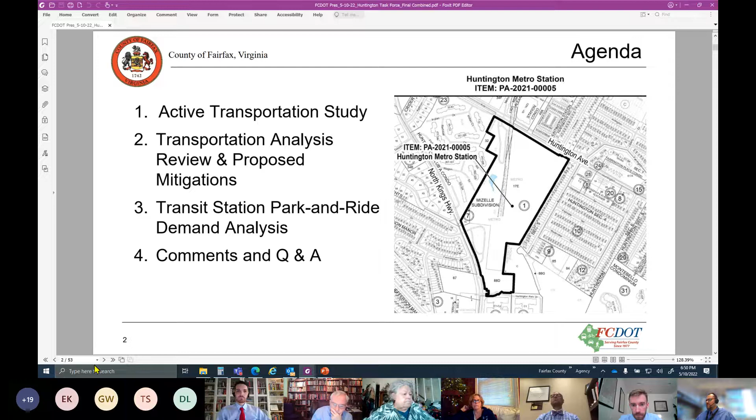I have your slide up here, sir, and you are on. All right, thank you, Bob. Okay, so the first part of our presentation today is going to be talking about the Huntington Metro Rail Active Transportation Study. We introduced this to you all a couple meetings back. This was a grant that FCDOT had applied for as part of a MWCOG initiative to do studies that look at transportation and land use connections. This was a good fit for that grant program, and we've been working on it since about last fall, and it'll be wrapping up in the next couple months.

We do have questions and answers at the end, but there's going to be a lot of new content here that you might not be used to seeing. So please feel free to raise your hand throughout or just chime in and let me know if you have a question on any of the slides. So we can go to the next slide.

So what we're going to be talking about in relation to the study: background and purpose, which I've already kind of done, but also what the purpose of the study is, the methodology behind it. When we talk about traffic analysis, we're looking at vehicular delay and capacity on the roadway. This study, however, is looking at the perspective of the pedestrian and the bicyclist. There's a couple different metrics used to do that, and I'll go over how that's conducted, the analysis that goes into putting together the study.

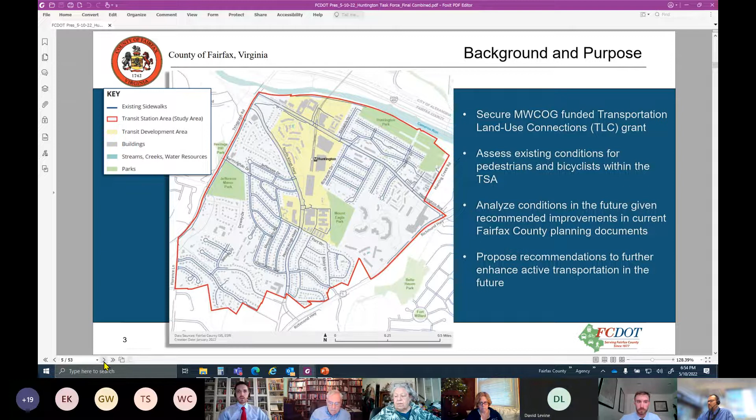One other thing I wanted to mention: last meeting we talked about the Dover-Cole study that was looking at interparcel connectivity. This really looks at the area outside of the Metro Rail station, the TSA surrounding it. We didn't want to overlap with what Dover-Kohl is doing, but that being said, we are incorporating some of their recommendations, such as the connectivity across Huntington Avenue.

I did want to mention a takeaway from our last meeting. We talked with the Disability Services Board, DSB. Their chair, Deborah Hammer, who is also the Mount Vernon district rep, and Claudia Villa, who works for Family Services at Fairfax County and is a liaison to DSB, specifically about the interparcel connectivity between Huntington Club and the Metro Rail station. We discussed some of their considerations when we showed them the concept with the meandering trail and switchbacks going up toward the metro station.

They weren't opposed to the design as presented, but one thing they did mention is, given the grades, something we'd want to consider in any interparcel connection along that steep grade would be to include more landing space. There are current requirements to have landings along the route, which we showed in the concept Dover-Kohl created, but they would like to see more of those. I think this task force can certainly consider that as we recommend plan text for any interparcel access, especially important for the disabled.

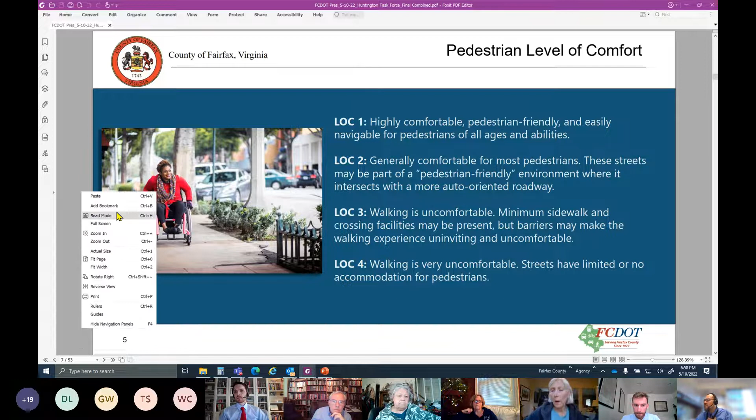I think I see a hand raised. Catherine Ward, you have your hand raised? I'm sorry, but I keep losing your slides. I don't know why, and then it just shows up with an RP and a big circle in the middle of my screen. I don't know if anybody else is having that problem. It may just be me doing something wrong, but I don't know what.

Is everybody else able to see the slides okay? I can see it fine. It's just acting weird in other ways. It comes back, but every now and again it disappears and I get a black screen with a circle with RP in it. Yeah, the RP is me, so I just made the screen full size. Hopefully that helps. Okay, thank you. Sure, sorry, no problem.

This is another look at what each of these scores actually means. Level of comfort, LOC 1, is top of the line, highly comfortable, for all users, with wider sidewalks, 10 feet or greater in width, down to a level 4, the lowest level of comfort, where you might not even have a sidewalk. That's the range we're looking at here.

If you go to the next slide, LTS is scored in a similar way. I don't think it's advanced yet. Oh, now I'm having issues, hold on. Yay, it's not just me. Not just you. There we go, sorry about that. I'm not seeing it yet, no screen. Hey Bob, when you click the share button, try to select the window as opposed to the screen, and then from there click on the PDF.

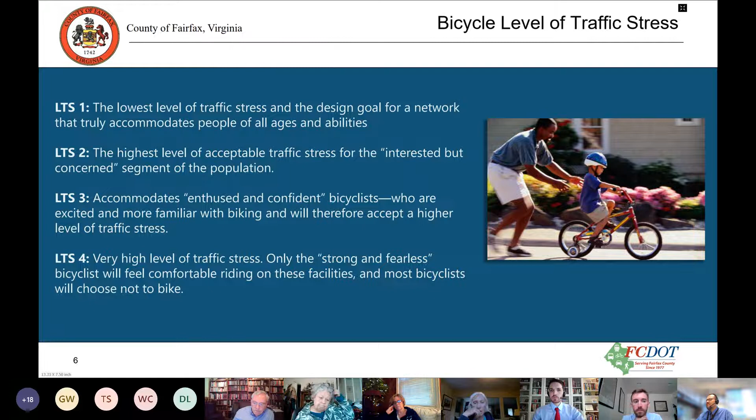Go ahead, Lynn, you have a question? Are we talking about North Kings Highway? Are we talking about Huntington? We're not talking about any of the bicycle stuff up and down the hill. Are we talking about between the Metro and Huntington Club?

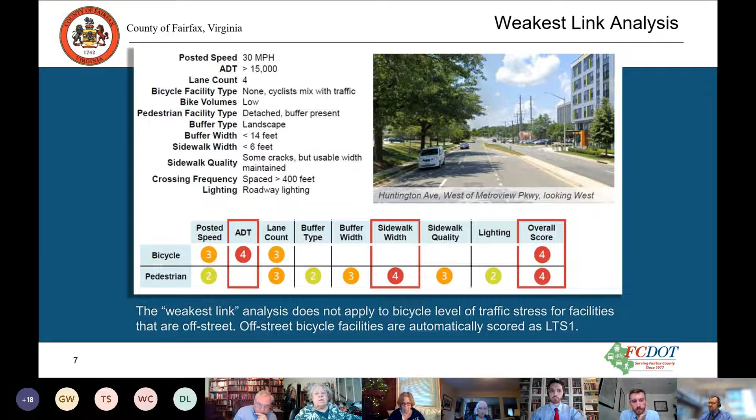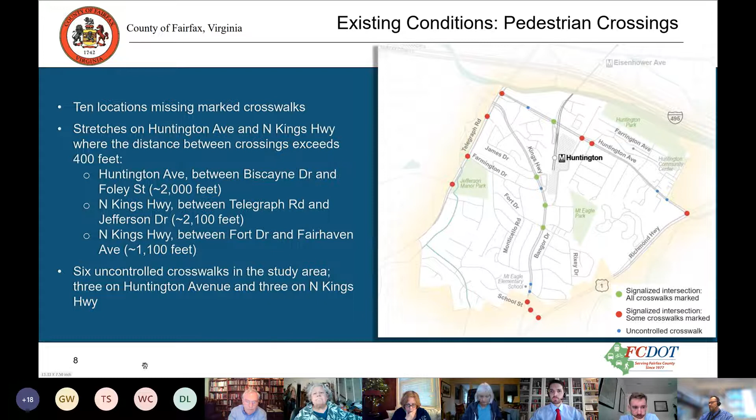If we move on to the next slide, you can see a somewhat similar situation for cyclists.

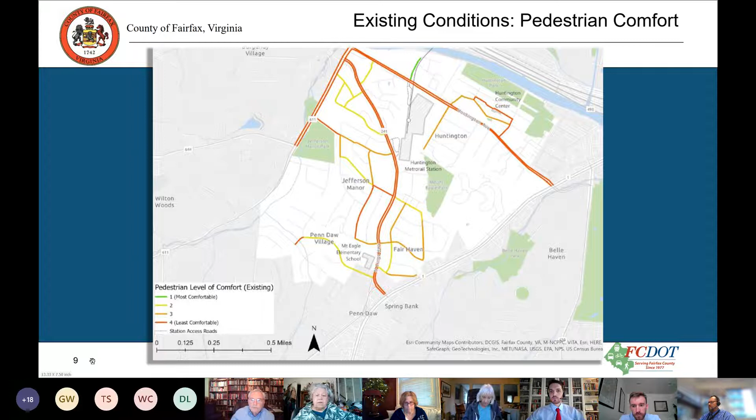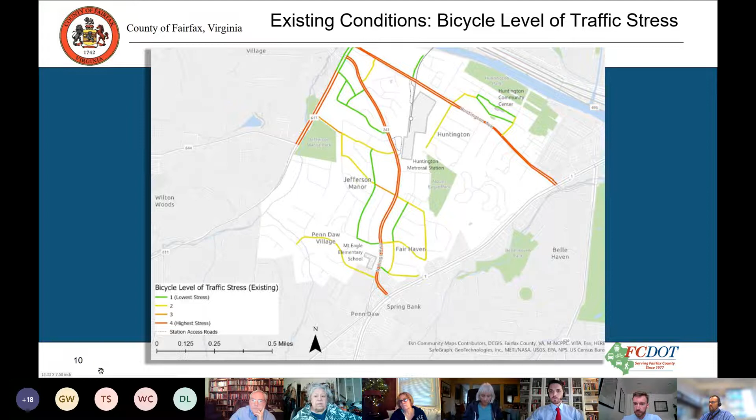So looking at the next slide, these are improvements that are both within the county's current planning documents, so within the comprehensive plan, taking into account the countywide trails plan, for example. We also incorporated a resolution put forward by the Jefferson Manor Association, JMCA, which was also adopted by MVCCA, looking at North Kings Highway south of the metro station down to Richmond Highway.

Those recommendations are highlighted in purple and italicized here, basically allocating the excess space on North Kings Highway from narrowing the travel lanes to pedestrians and cyclists, and installing a HAWK beacon at the crosswalk directly in front of Mount Eagle Elementary School, which is now actually part of the BRT plan. Vanessa had presented on that on the 28th. The other proposed improvements are from the comprehensive plan.

So installing a 10-foot path with a 5-foot landscape buffer along North Kings Highway, and you see what that does to the scores. Still not where we'd like to see them—we're striving for 2 or better—but you do see a bit better level of comfort for pedestrians, and a couple more areas with a 3, a more comfortable walking network for peds.

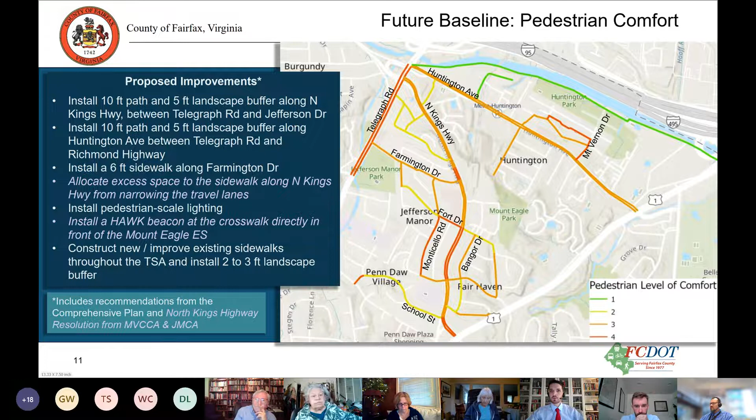So we can go to the next slide and see what these recommendations do for bicycle level of traffic stress. Again, improvements certainly on Huntington Avenue—if we're including a shared use path there, that takes cyclists off the street and separates them from traffic, giving them a lower level of stress. On North Kings Highway south of the metro station, given the limited right of way, there's difficulty improving that score.

So what can we do to further build upon these recommendations? That's what Fehr and Peers looked at. In the next slide we'll talk about a couple of those.

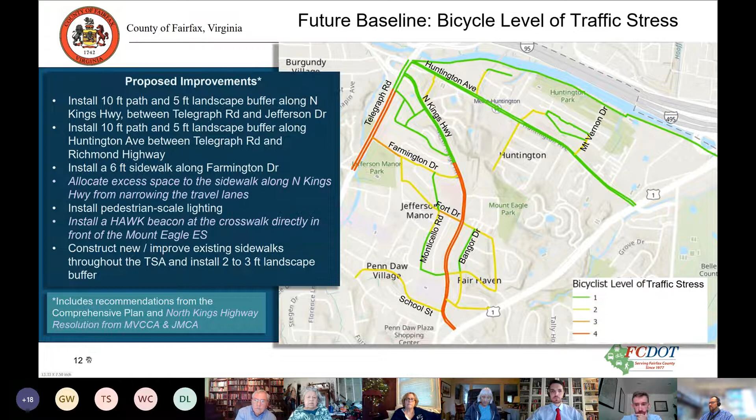One of the concepts they put forward was a slow streets concept, and this really took off during the pandemic. A couple of more urban areas pursued this idea of partially closing off local residential streets to residential or local delivery traffic only, using signage to indicate these are slower speed streets, 15 miles per hour or less.

San Francisco did this, Washington D.C. did this, with a little bit of mixed success. I know D.C. has discontinued their program post-pandemic. I don't think it was successful everywhere—in some spots people ignored the temporary barriers.

However, San Francisco has gone beyond this concept and instituted more permanent measures, as you can see on the bottom right. That's one project that has taken hold in San Francisco post-pandemic, using more permanent bollards or flexi posts to indicate that this stretch of roadway is intended for local traffic, slower speeds, and to share the roadway with pedestrians and cyclists.

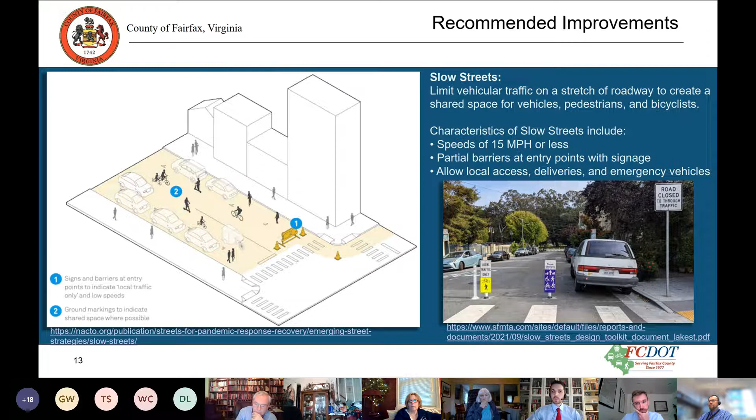We can go to the next slide, here's another concept I mentioned earlier, the road diet. The general idea, as you can see in the image on the right, is to take a car-oriented street with a lot of lanes and parking, pinch that in, give it a diet so to speak, and reallocate some of that space for pedestrians, cyclists, even dedicated bus lanes. That's something Fehr and Peers proposed for Huntington Avenue: removing one of the through lanes in each direction between Telegraph Road and Richmond Highway, providing more space for pedestrian and cyclist activity.

Go ahead, Lynn. Oh, you're muted, Lynn. Lynn, you're still muted.

Oh, I'm sorry, what is that long dark thing supposed to suggest over there when you make a road diet down to two lanes? Oh, so that is supposed to be a bus. That red shading on the right, you could use a road diet to stripe out a dedicated bus lane, for example.

So essentially, Huntington Avenue has four through lanes. If we did a traffic study and determined we only need two through lanes, and there's not a capacity need there, we could repurpose some of that space for a dedicated bus lane. We could repurpose it for protected bike lanes, and again move the curbs in, even perhaps to expand the sidewalk or put in a shared use path. So it's just a recommendation to think through how we can find space for these other uses, and there would need to be some additional analysis to see whether that's feasible.

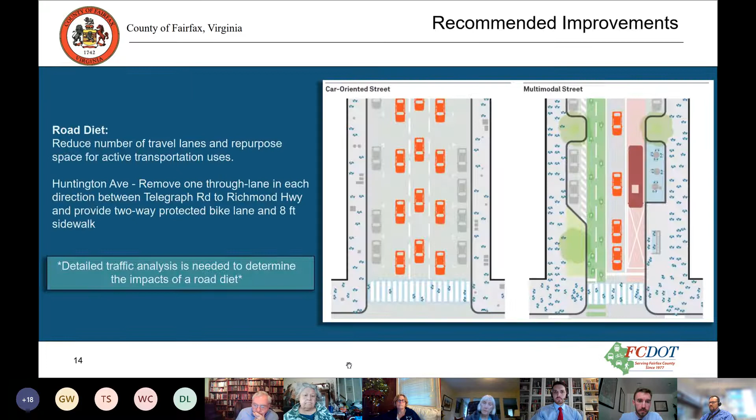But yeah, good point. Okay, I think we can go to the next slide. It's freezing up a little bit.

There we go. Okay, so this is obviously a very wordy slide, but I want to capture all of the recommendations being proposed as part of the study, kind of consolidate them. We will be posting this online, so you can go back and read through these and see which ones you like. If you have any comments, we're going to be doing more outreach as part of the study to talk through these with the larger community. This is a list of recommendations by street that go beyond the ones I already talked about that are proposed in the comprehensive plan and the North Kings resolution.

You see a lot of them are, as I mentioned, the slow streets, improving sidewalk quality. So not only widening the sidewalk, but Fehr and Peers, when they did their assessment, went out and did a field study. They noticed areas that had cracked sidewalk or uneven pavement, so making those maintenance and upkeep improvements could help comfort. And then lighting, pedestrian-scale lighting is a big one, making sure people can see at night. We're not just lighting the roadway for vehicles, but providing lighting at the pedestrian scale so people feel more comfortable walking at night.

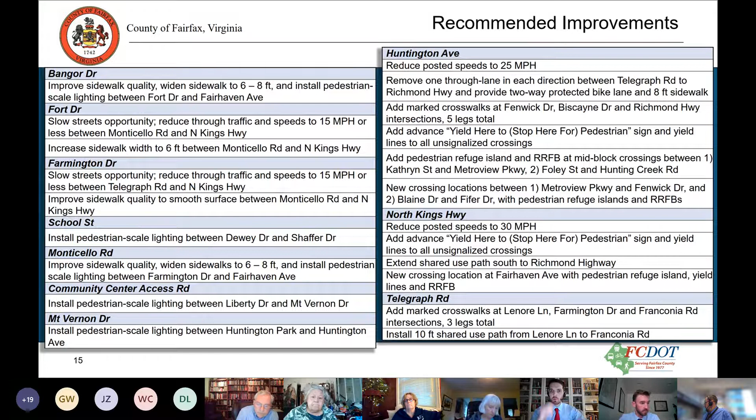Okay, let's go to the next slide. The next couple slides will show, given this list of recommendations, what the effect would be on the metrics we talked about. The first one is pedestrian comfort. You can see that throughout the whole TSA, we've achieved level 2 for pedestrian comfort, so you have a network that is actually comfortable for pedestrians to use.

Lynn: But that's nowhere near your 400 or 500 feet—those are still long walks in between there. Response: Yeah, between those, certainly, there would still be some long walks. And there are only about two others there, I think, in the whole distance.

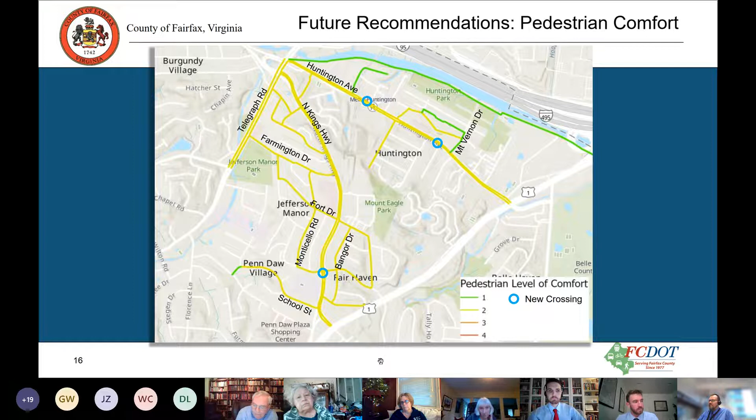Okay, we can go to the next slide—this shows the results for bicycle. Bicycle level of traffic stress is markedly improved. A lot of the recommendations take the cyclist off of the roadway, and when you do that, level of traffic stress doesn't really apply since you're separated from traffic in a sense.

On North Kings Highway, you still don't see the lowest level of traffic stress south of the station, again due to right-of-way constraints. But taking into consideration that there are lanes that could potentially be narrowed, and there is some space as the North Kings Highway resolution that JMCA and MVCCA proposed could incorporate a wider pathway by using the median strip along the sidewalk, there is a solution that could improve bicycle level of traffic stress along the whole stretch there.

So we can go to the next slide, and I believe this is pretty much it for this presentation. As I've said a couple times, we are still finalizing this study. We have Fehr and Peers on until about June, so a few more weeks. Beyond them tightening up the report for us, we're going to go out to the community and various other stakeholders to get their take on this, see if there's anything we need to update or change, and then finalize the study report.

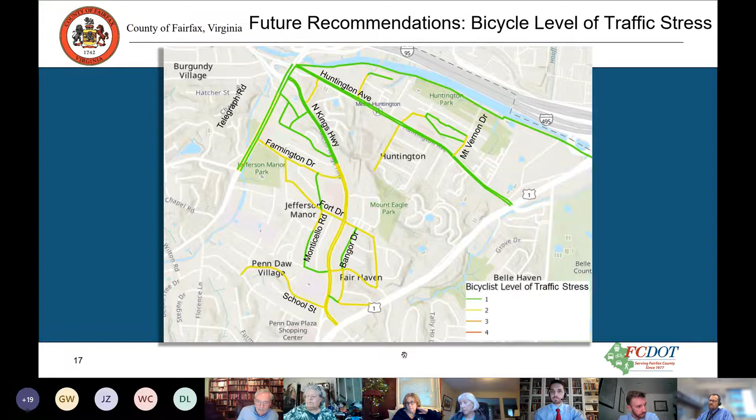Okay. Were there any other questions? That's it. My email is here, so if you have follow-up after the meeting, reach out to me, and I'll continue to keep you informed on how this study is progressing. We can come back to the task force in future meetings to give more information on our outreach efforts.

Let's see, go ahead. Yeah, I have a question. In your last slide, you indicated comp plan language, which the SSPA task force is going to make a decision on. When will we see that? What's the schedule, the plan for that?

So, Graham. Yeah, Catherine. One thing we wanted to go over at the end of the transportation presentations was that exact thing, the next steps. But spoiler alert, next month. So stay tuned, we'll get into the details. Okay, thank you.

Okay, any other questions before we go on to the next? All right, look, Mary has her hand up. Oh, Mary. I just didn't put it down.

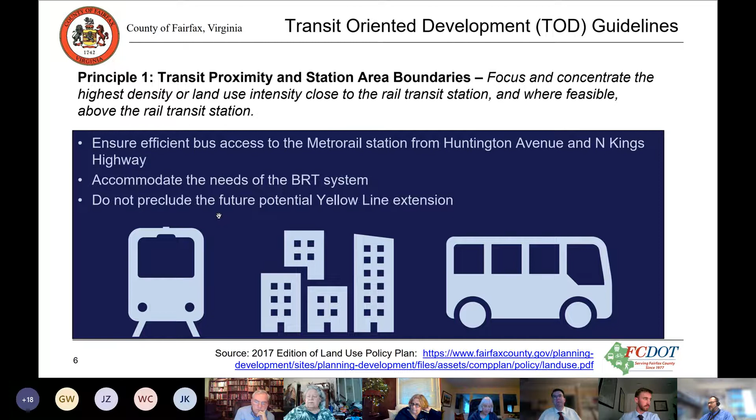When we're looking at transit proximity and station boundaries, we're looking at access to the Metro Rail station along Huntington Avenue, North Kings Highway, accommodating the future BRT system, and definitely not precluding the potential for the Yellow Line extension. That's one of our TOD guidelines. We're also looking at pedestrian and bicycle access. Tim gave a great presentation about bike and ped access, so we're looking at recommendations from that as well, which works into the TIA analysis. We're not trying to preclude the benefits that pedestrian bicycle access will have, so we need to accommodate that within the TIA analysis as well.

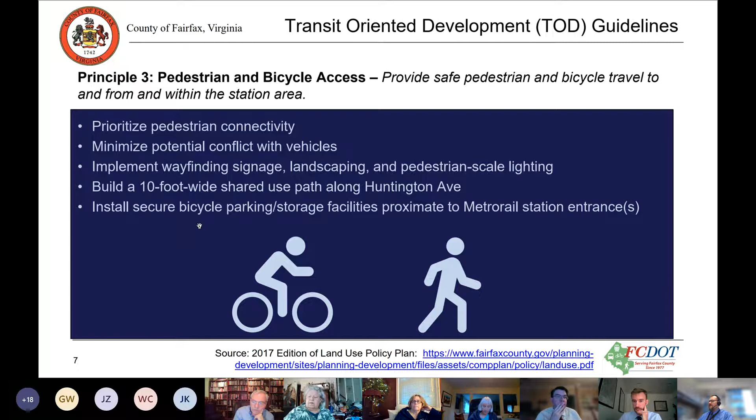Let's see here. This is picky on the advancement here.

Street design: we're looking at safe, gridded, attractive streets, while still mobilizing the vehicles that can get through the area, and also looking at other modes or transit modes in the area. We're seeing accommodation for not necessarily on-street parking, but wider sidewalks, street trees, and such, plus parking on site for the transit use.

I'll have a presentation about the parking garages on the site after this, and also how we're trying to maintain adequate structured parking — not just for the transit use itself, but also so there's adequate parking provided by the new land uses as well.

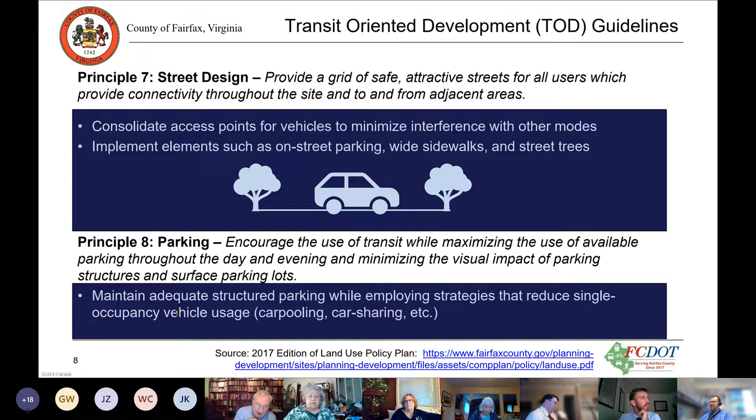Transportation and traffic: we're also looking at transportation demand management as the project is being constructed and built, looking at ways to get people out of single occupant vehicles — ride sharing programs, bus transit planning, parking management, alternative work schedules. We're coming out of COVID now, with teleworking and other non-motorized options like bicycling or just walking. Those are strategies that can be employed.

So those are the background, the TOD guidelines, and it's trying to advance.

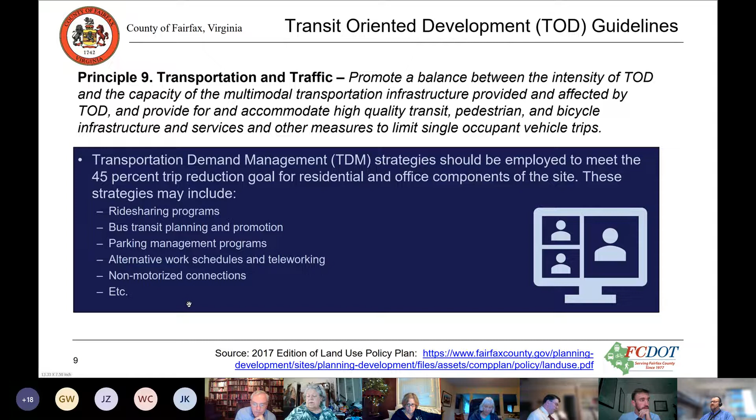As we started the analysis, this is with Kimley-Horn. They did the primary part of the analysis, and we provided them with a lot of data from surrounding properties in the area. Since they started the analysis during the pandemic, early 2020 to early 2021, we weren't able to get out there and do traffic counts, so we had to look at other studies in the area for their traffic impact analyses.

We used that data to give to Kimley-Horn to determine what the traffic volumes or traffic might be like in the year 2019. We used 2019 as the base year.

That was pre-pandemic, so we had a lot of information from the North Gateway CBC — their TIA, Huntington Crossing, the Parker, also 2550 at the corner. Huntington Club has its rezoning TIA that was used, the Arden, Aventon, and we even went down to South Alex in the Penn Daw area for information gathering. All of that was combined to put together the analysis.

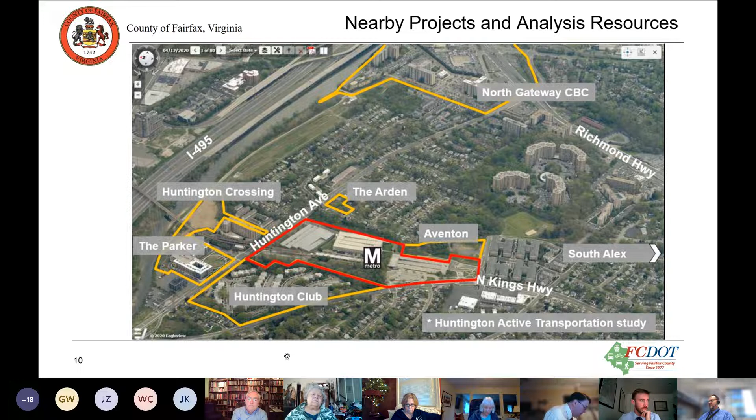Trying to advance slides here. Okay, so there were 24 intersections done with this analysis.

They're all scattered throughout, along Huntington Avenue, North Kings Highway, Richmond Highway, and Telegraph Road. We had a couple, or 3, in the North Gateway area — I'll talk about those as well — and some in the Penn Daw area too. We pretty much canvassed the whole area to get a sense of impacts along all 24 intersections and see where there are possibilities of mitigation, or what the impacts are based on the land uses proposed at the Huntington Metro Station.

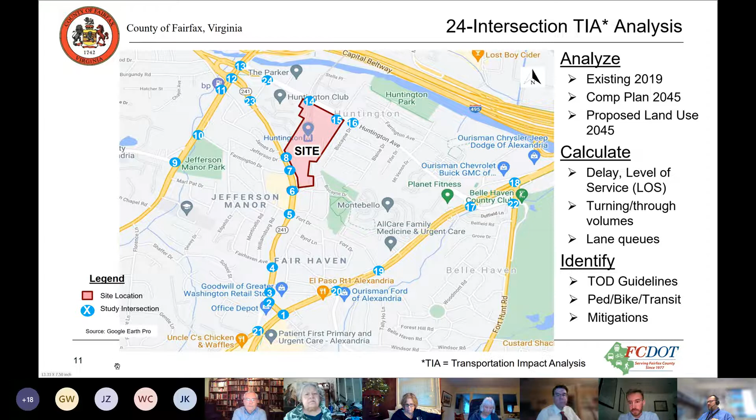As part of the 2019 ADTs, or average annual daily trips — AADT, same thing — these are for 2019, used as part of the analysis. On Huntington Avenue, we have 16,000 vehicles in 2019.

There's 50,000 from Huntington Avenue north to the Beltway along Richmond Highway, and south of Huntington Avenue about 55,000 vehicles per day. Telegraph Road is split in two, north and south of Franconia Road: 37,000 up to the Beltway, 20,000 south of Franconia, and North Kings Highway has a volume of 24,000.

So we used that as the basis of the analysis to determine basic trip volumes before the pandemic.

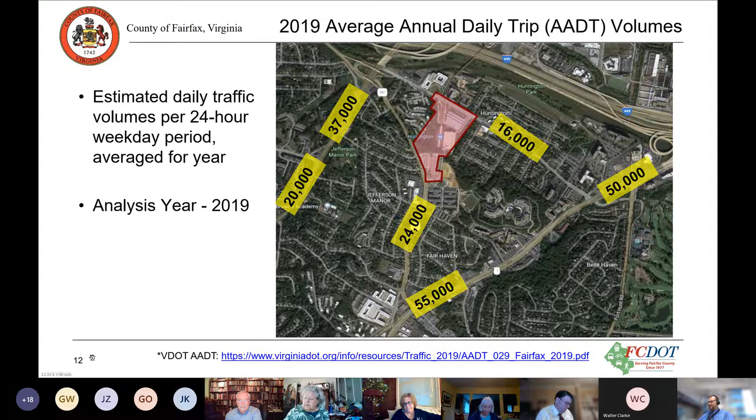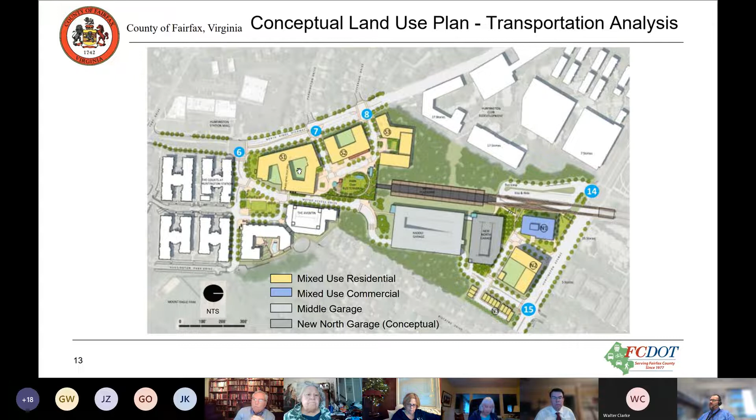So what the analysis was looking at was the maximum that they could do per the comp plan amendment. We looked at what the land units have in and around the station.

The current comp plan already accounts for 48 dwelling units at the Pavilions at Huntington Metro, 802 dwelling units that are part of Huntington, Huntington Club, and Avonton, plus 250,000 square feet of office and 30,000 square feet of retail.

With the proposed comp plan, the applicants, Stout and Teague and WMATA, are looking to add 685 mid-rise residential units and 815 high-rise dwelling units, plus more square footage for office and retail. Altogether with the residential, it'll be 2,350 residential units in land units E and F, 335,000 square feet of office, and 47,000 square feet of retail.

So that is what was analyzed in the TIA. When they come back in with their rezoning, they may change the programming, but we wanted them to maximize their development potential with the TIA, so we know this bar is set at this level, and what mitigations, levels of service, or impacts there are to the intersections and streets.

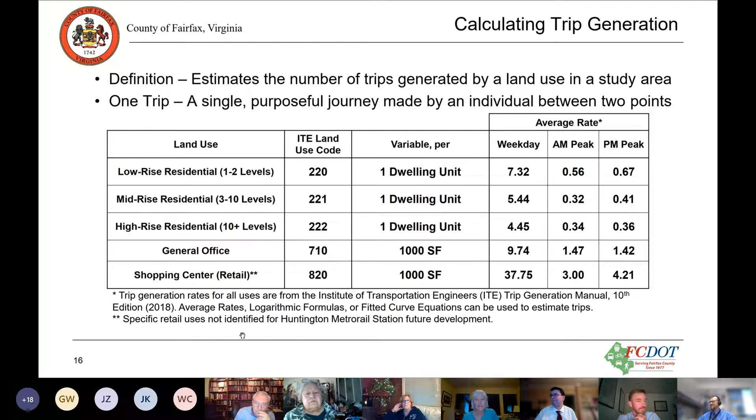So when we're doing the transportation analysis, there's an understanding that we have with VDOT, and also along with our transportation policy plan. I mentioned this level of service D. It's because it's on the on-street network that the county and VDOT also share, that level of service D is under 50 seconds of delay on signalized intersections. That is what the target goal is, LOS D.

However, we have an MOU, a memorandum of understanding, with VDOT in the Northern Virginia district, that in and around transit stations, because of the uses there, we can accept up to a level of service E, which is, I believe... 80 seconds, right? Up to an 80-second delay at the intersection. So this is something that we have in other transit station areas.

Huntington Transit Station is named in this MOU. We also look at the roads that are not part of the national highway system, so that way we can have LOS E on some intersections. Richmond Highway in this corridor is part of the national highway system, so it has to retain its LOS D standard. It cannot go up to LOS E because it's an emergency route or evacuation route, and it's part of Route 1, the national highway system.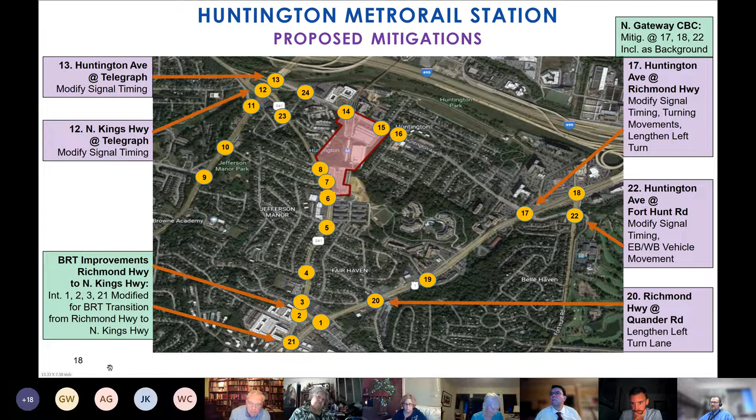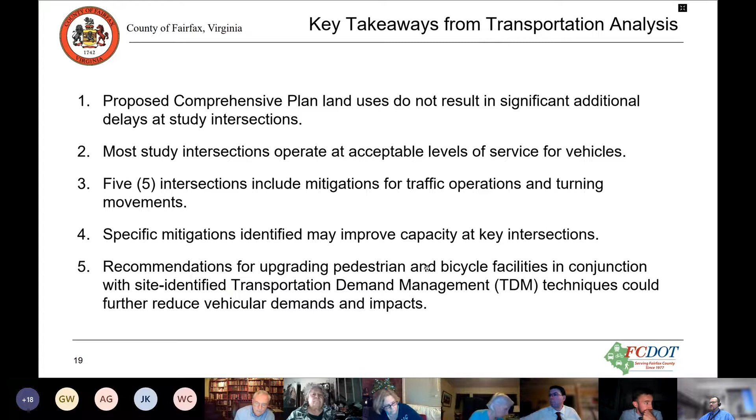So key takeaways from the transportation analysis, we did talk about that, basically saying 5 intersections include mitigations, most are at acceptable levels. I just talked about that. And the proposed comprehensive plan, the big takeaway number 1 is it does not result in significant additional delays at other study intersections. So we'll be looking at TDM management techniques for recommendations in the comp plan, and we're looking at specific mitigations at those key intersections. We talked about that. Moving on, questions, you guys had questions throughout. I'm going to move forward. So the next study was a park and ride demand study.

This takes into account the 3 parking garages on site. The south garage was closed in 2018. The park and ride demand study is looking at the transit side, the 2 garages that remain, to see if they can viably maintain a supply that feeds into the transit station use for buses and the rail system, and for when new uses come online as proposed with this plan amendment.

They also want to know: do they need to replace the south garage? So in their study, which I'll go through, they looked at the park and ride demand analysis.

These dots are places with registered addresses that use the Huntington Metro Station. The ones in yellow are basically in the Huntington core. This box, 5 by 7.5 miles, is their park shed, so all the users here use the Huntington Metro Station. The ones in blue are more or less for Franconia Springfield, and the reds are scattered for Alexandria and Maryland, but they do access this Metro Station site.

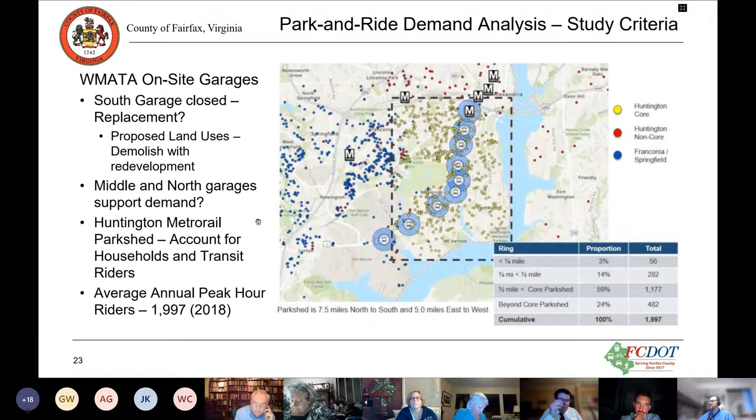They also looked at forecasting how far into the future demand for the 2 garages, which equal 2,732 combined spaces, would last. They're using MWCOG, the regional model, which looks at everything in the region growing to a certain level. They started with a base year of 2018 or 2020 and projected out along those lines to 2030, 35, 40, 45 and so on.

The land use plans include every land use plan in that 5 by 7.5 mile box, including the Embark project and other development projects, and then the current census as it projects out what that might do for parking demand.

The red line here is when WMATA anticipates the north garage reaches its end of life. The north garage was built in 1990—sorry, let me backtrack one slide—the north garage was built in 1990, and the middle garage in 2008.

What they're looking at in the analysis is that 2035 is when they think the north garage might need to be replaced. But at that time, those 3 trend lines show the parking demand will be met up to that level. It's the MWCOG level line, around 2040, that might project there will be more demand for spaces than the capacity of 2,732 can handle. So the red line will say, hey, we might need to replace that garage.

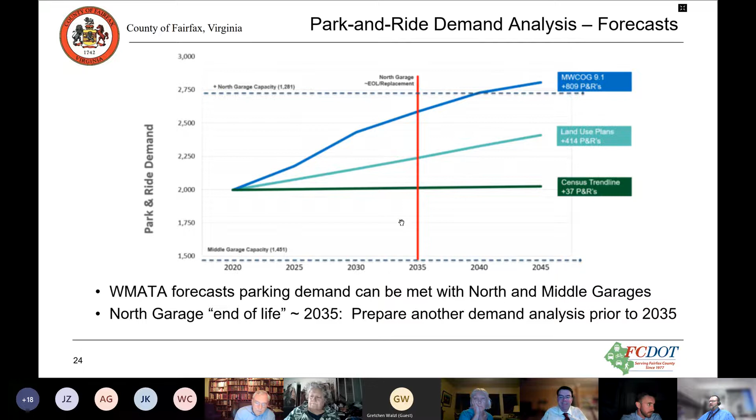So one of my recommendations from doing this analysis is that there are a couple of things that are going to happen in the next 10 years that might affect what happens with this garage. My recommendation for WMATA is to prepare a letter with FCDOT acceptance of that analysis, but...

Before the BRT is operational around 2030, and before the garage is replaced or reaches end of life in 2035, another parking demand study should take place. So sometime in the future, maybe 10 years from now, they take another look at the parking on the site, the 2,732 spaces, the development being proposed along the north side of the station at Huntington Avenue, and all the other development happening in the area, and do another study.

That way we'll know whether the north garage has to be replaced with a one-to-one replacement, one space per space, the 1,281 spaces, exactly as it was before, or whether it can be less. But we don't have enough predictability at this point to tell, because the BRT isn't operational yet and the end of life isn't close yet. So this demand analysis is going to happen again about 10 years from now, with all those things that come up. We need to look at it that way.

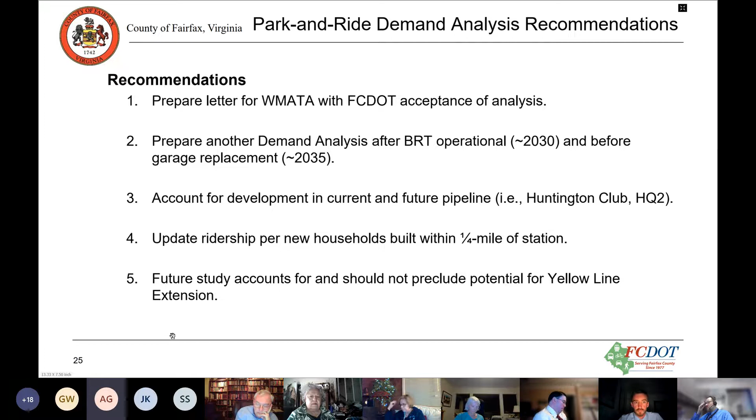Okay, Alexis, you have a question. Yes, is the possibility of housing or other types of retail or other space being considered when this north garage reaches the end of life?

Could it be a parking garage with housing or other amenities included with it? Right, yeah, the applicant, WMATA and Stout and Teague, were looking at residential on the north side here. It was a concept plan way back in my presentation, but they were looking at whether the transit garage can be wrapped with residential, rather than a standalone garage. We're obviously way ahead of what could potentially happen with the site.

So as we're considering planning, is the consideration of other types of uses of space along with a garage part of it? Yeah, absolutely, the consideration. I can add on to that.

There's sort of two objectives that we have: when the north garage is reconstructed, we want to reconstruct it as a more integrated garage with the middle garage, as well as with the station, because that also provides some sharing benefits and improved access, particularly for ADA customers.

One second, my little boy is coming in to tell me that I should come inside. One second.

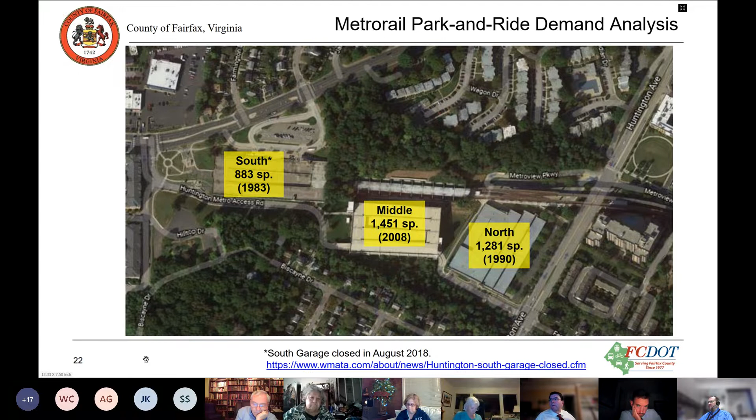So we're in May, as you know. We're finalizing comments from VDOT and FCDOT. We already sent that out to Kimley Horn, and we're looking for them to do a resubmittal of their TIA so we can take a look at it, review it again, and then have our final review done by June. And then hopefully by July, we'll have the VDOT and FCDOT acceptance of the traffic study.